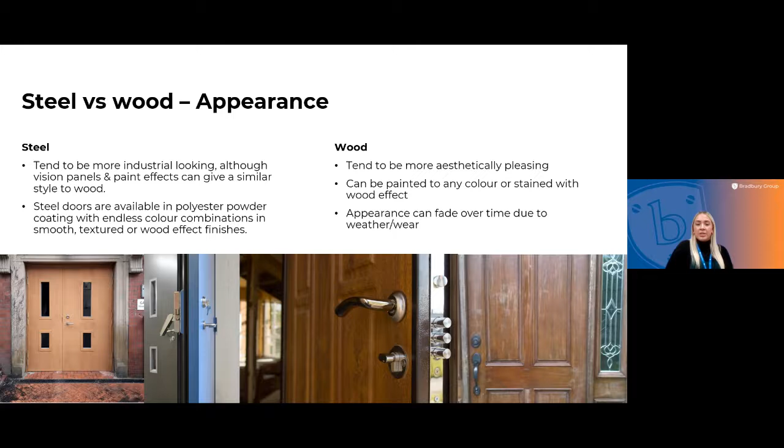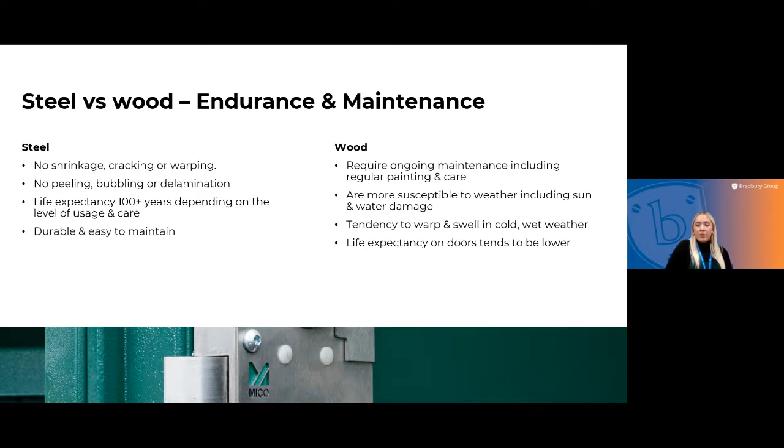Steel doors are extremely durable and easy to maintain, whereas care for wooden doors requires more maintenance. Wooden doors also have the tendency to warp and swell in the cold. Wet weather and weather exposure does impede the life expectancy of a door in general.

So, security. Steel doors provide a more natural deterrent to potential thieves due to their nature. They can resist high impact power tools and come with LPCB certification up to SR8. Wooden security doors tend to have a steel inner and are clad with wood to ensure high security standards are met, but wooden doors can only achieve up to SR6.

Generally speaking, wooden doors with lower security ratings take less force to dent, crack or break, and they have less resistance to high impact power tools.

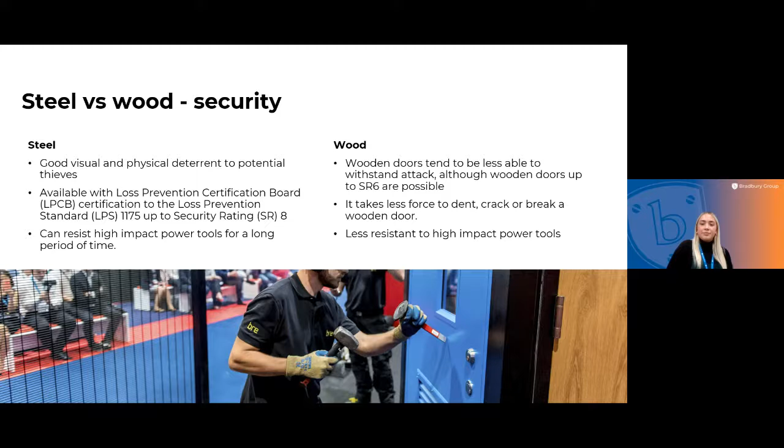Steel doors can withstand up to 240 minutes of fire resistance, significantly more than a wooden door at just 60 minutes. Steel doors tend not to require intumescent seals and fire retardant paints, which are required when fitting a wooden fire door. Normally, wooden doors cannot exceed 60 minutes of fire resistance and are subject to the same standards as steel doors.

Wooden doors can be finished to match existing timber door styles, but these need to be fire retardant in nature. Unlike a wooden door, steel doors have no limitation on width and height, meaning non-standard openings can be fitted with steel fire doors.

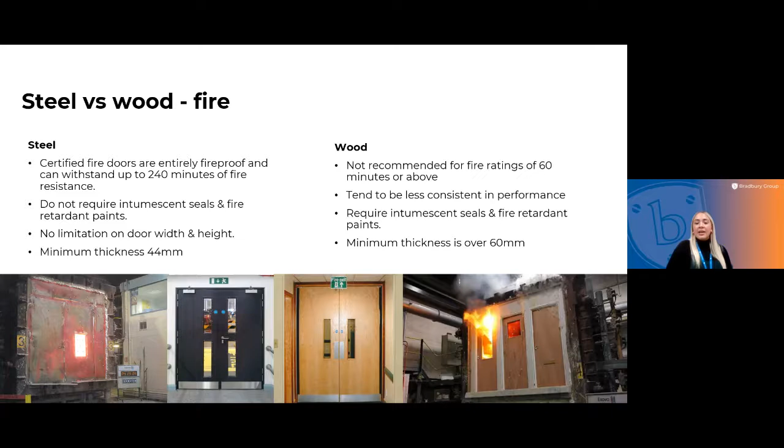So in this section, we'll take a look at a typical door formulation and the types of options you can expect to see on a steel door.

Steel doors can be certified up to LPS 1175 SR8. These tend to be more specialist providers, including the Bradbury Group.

Vision panels are available in a wide range of sizes and configurations and can be used in security doors up to SR4 and in fire-rated doors, providing they meet the industry standards.

Doors with lift-off hinges ensure much easier installation and mean installers do not have to hold the weight of the door when fitting. Bradbury doors also come with a lifting hole at the top of the door to help lift the door, dropping it into place and making installation easier, as well as a 10mm threading to enable easy lifting.

Side and over panels are ideal for aesthetics on communal doors and enable you to adapt to the opening so that a standard size door can be fitted. Door openings can be much larger than the door requirement, and panels are ideal for fitting into the door space, as a large oversized steel door can be much heavier and more difficult to open.

Polyester powder coating is a safe, clean, economical, eco-friendly, strong and durable paint method. It is solvent-free, lead-free, easy to dispose of and highly durable with a low carbon footprint. It meets a wide range of global coating standards and is available in almost any colour and range of finishes, including matte, gloss and textured.

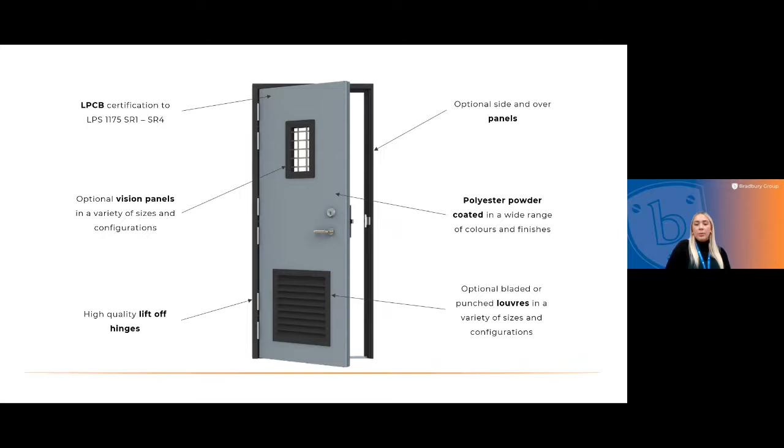Bladed and punched louvers are utilised in doors for ventilation and airflow. They can be supplied in steel and aluminium and come in a range of sizes and configurations also.

Door closers are available in a variety of devices and used to open and close doors. They can reduce the speed of movement of the door, particularly for heavy doors, and can be linked to fire alarms, ensuring the safety of pedestrians.

There are also a range of limit stays available which can prevent the doors from causing damage to their surrounding infrastructure. Fire ratings are available up to 360 minutes, providing integrity against fire for up to 360 minutes. The Bradbury Group has certified doors up to 240 minutes, meaning the doors withstand fire integrity of 4 hours.

Steel doors can be supplied in multiple frame profiles, which can be adapted to suit the supporting structure. Varying thresholds are also available to suit the surrounding conditions. As an example, inward opening thresholds can withstand water ingress, or ramp thresholds are ideal for trolleys. All thresholds should ideally be DDA compliant.

Doors are available in single, double or leaf and a half. They have inward, outward, sidewards or revolving openings. Steel security doors tend to have an inward or outward opening as standard.

Hardware is available in multiple options, but these do become more limited when standards and certifications get involved. Specifications of doors vary depending on standards, but technically a door can be made to fit almost any opening. The doors must be specified to suit the required use and standard, meaning some specification restrictions might come into play.

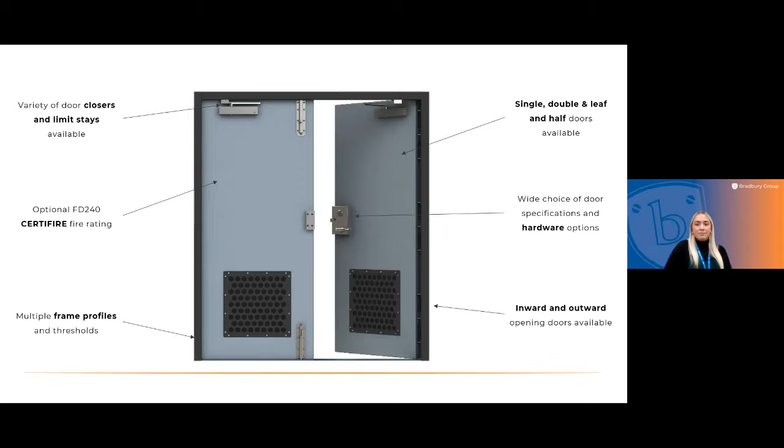Doors have many uses. A personnel door is a security door that is specifically designed and fitted to offer your employees access to and from your commercial building. Instead of being accessible to the public, these secure door systems are set up so that only approved personnel have access to and from the premises. They are an essential part of a commercial building's security system alongside CCTV, alarms and security personnel.

An escape door is one that allows people to quickly pass through, even if it is locked. They tend to open outwards towards the means of escape. They take priority over security and can be used by anybody in the building, or if the capacity for the room is more than 60. They tend to be fitted with push bars or escape locks with a lever handle externally.

Entrance doors are the main route into the building, dwelling or apartment, where there are usually more than one door. They give direct access to the street or road and tend to be more aesthetically pleasing.

Multi-point doors provide lock-in at different points to provide higher levels of security. It is UPVC doors that rely more heavily on multi-point locking due to their composition.

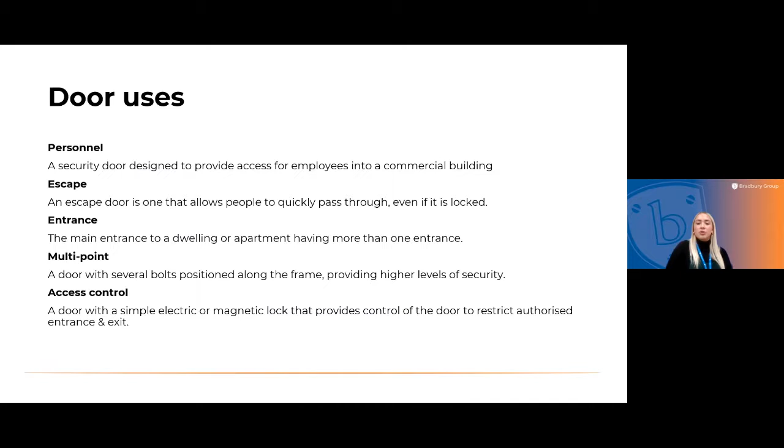In this section, we'll go through these security certifications and what they are and what they mean. These are PAS 24 and LPS. As previously mentioned, PAS is a standard set by an industry to ensure that all manufacturers are making and selling products that reach the industry benchmark for quality.

PAS is overseen by BSI, British Standards Institution, who manage the setting and distribution of the PAS standards. It is a standard of testing to measure the security performance of windows and door sets to ensure they can resist a level of attack from an opportunist burglar.

PAS 24 came into effect on the 29th of February 2016 and supersedes the previous version. It was developed as part of a collaboration with a wide range of trade bodies and organisations.

PAS 24 and Secure by Design are independent of each other. However, most Secure by Design products must meet PAS 24 standards as a minimum alongside other Secure by Design requirements. PAS 24 or an equivalent standard is now required to meet building regulations for new build properties.

Doors are subjected to mechanical loading, solid impact, hard impact, weather resistance and manual testing, including applying a force of 450 kg to each piece of hardware for 20 to 30 seconds with both shock and without shock force. It is important to note that the panes of glass are not tested as PAS 24, whereas LPS standards test this area.

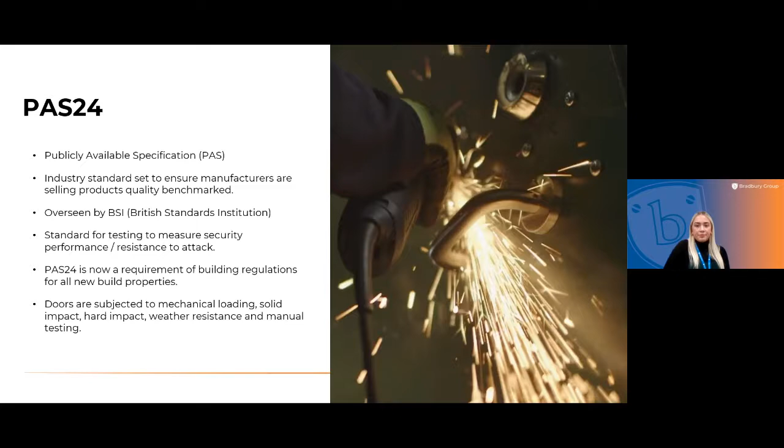LPS, loss prevention standards, are produced by the Loss Prevention Certification Board to help ensure that a product or service meets the needs of its users.

LPS 2081 is a standard created by BRE and Secure by Design. It sits between LPS 1175 rating 2 and Secure by Design PAS 24, and specifically evaluates the resistance to unauthorized access by various physical security products when targeted by intruders using stealth. The standard specifies 2 grades of security relating to tools used and time taken by intruders where they want to avoid making any significant noise.

The noise element is the main difference to this standard, which sets it apart from LPS 1175 and links directly to vandalism and security. The LPS 2081 standard is commonly used on our communal entrance doors, where vandalism is a problem on glazed doors. There are 2 grades of rating, A and B, according to the tools and time taken and time likely to be used by an intruder in situations where they will wish to avoid making significant noise.

Security rating A is the lower of the 2 security requirements. It involves a sustained attack on both glass, framework or mechanical fixings using hand tools for a period of up to 1 minute. Security B rating prolongs the attack for up to 3 minutes with an enhanced set of tools. Any doors that are awarded a Security B rating can be considered a more secure product.

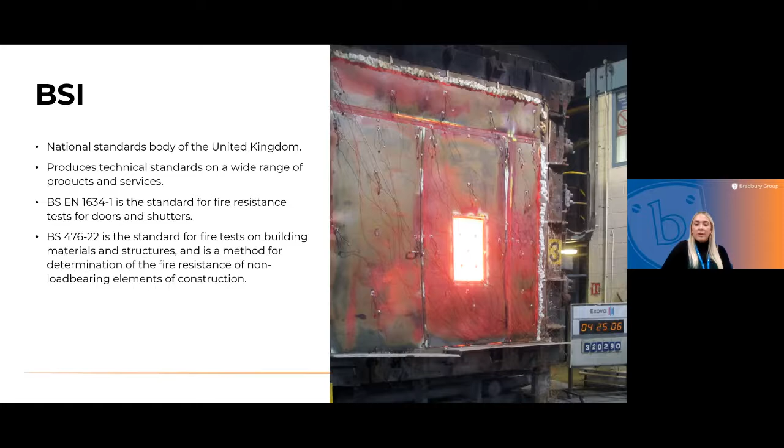So on to Certifire. It is an independent third-party certification scheme which assures the performance, quality, reliability and traceability of fire protection products. It is recognised by regulatory authorities worldwide and provides regulator, specifier, customer and end user confidence in stated performance of the products tested, giving assurance as to the performance of the products.

Using certified products correctly installed provides a powerful demonstration that due diligence has been served. Certifire is an internationally respected mark of fire safety and one of the most authoritative in the industry.

It is most used by manufacturers of passive fire products and systems as it offers the opportunity to differentiate products and processes from non-certified equivalents, thus helping to access the markets worldwide.

The scheme can also be useful to architects, specifiers, contractors and building owners, as Certifire provides assurance that correctly installed passive fire protection products and systems will perform as required, thus avoiding costs and mistakes and dramatically reducing risk.

So CE, or also UKCA - CE on external fire doors came into effect on the 1st of November 2019 and is a conformity mark used by the European Economic Area.

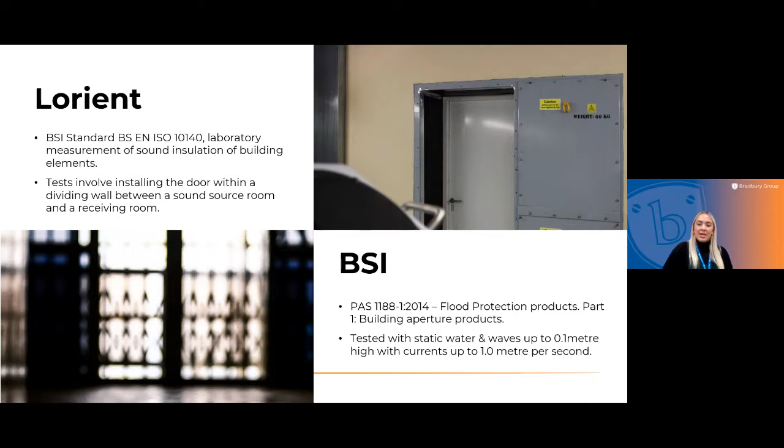So now into some products and the variations you can have with these products. Bradbury Group specialises in bespoke door sets, providing made-to-measure solutions based on project specification rather than stock sizes. Making doors to order reduces the need for packing and weaknesses in security and fire protection.

Even if a door is certified, the surrounding infrastructure needs to be sufficient to withstand attack or fire. There are a range of options available, including single, leaf and a half, and double door sets, meaning doors can be fit for purpose as well as providing the necessary protection.

A standard structural opening is up to 2,600 millimeters - that would be a very small door if it was 200. But bespoke openings can be catered for, including a range of side and over panels if required.

Bradbury Group doors are LPS 1175 issue 7 certified up to SR4 and come with fire certification up to 240 minutes, as said before. Acoustic doors are available in a range of options up to RW42, providing a good level of sound protection. All doors can come with stays and closers, and over panels can be removable for access.

So this is a typical leaf construction for an M2M2 Bradbury door. This door is security rated to SR2 and may also be fire rated. The leaf thickness is typically 66 millimeters and manufactured from Magnelis.

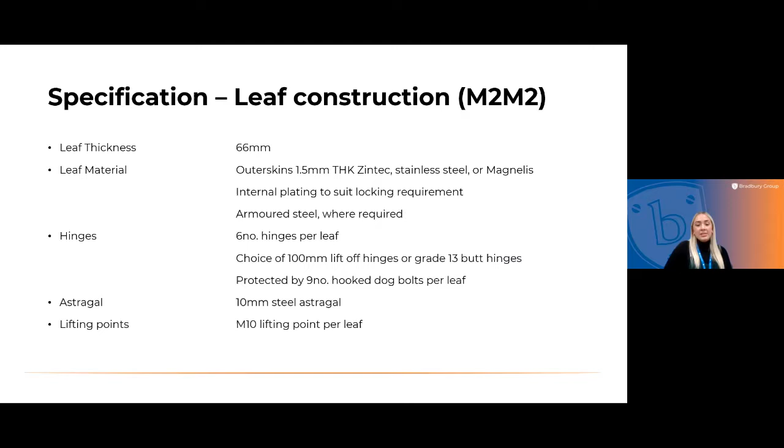And then this is a typical frame construction specification for M2M2 also. The profile tends to be 110 millimeters deep as standard, and again is constructed from Magnelis.

It has fully welded frames which are available, but standard frames can be butt jointed. Frames are reinforced with a 3 millimeter chassis system, and thresholds are available in steel or aluminium. Each door option has a specific specification, and doors can be customised depending on project needs.

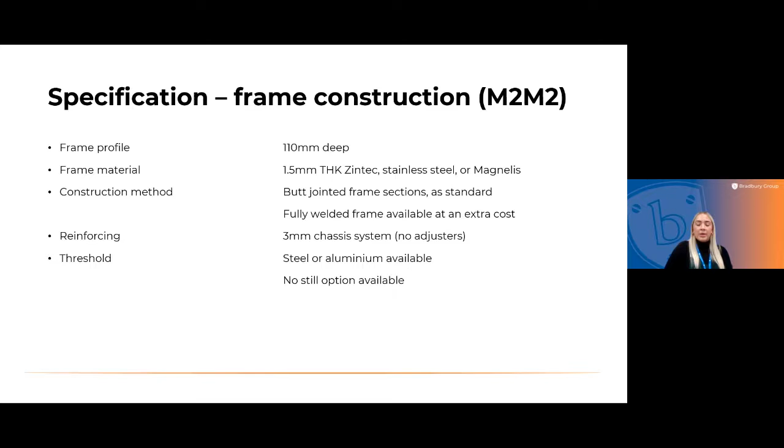We also do communal doors, which differ from the standard security door, for example our Newton doors. They are certified to LPS 2081 issue 1, security rating B, and are also approved by Secure by Design.

They are constructed from aluminium in a range of different designs, and each door can have a range of solid or glazed infills. They come with pivot hinges and a range of locking options. Optional extras specific to communal entrances can be sourced and supplied, including bollards, handrails, and kick plates.

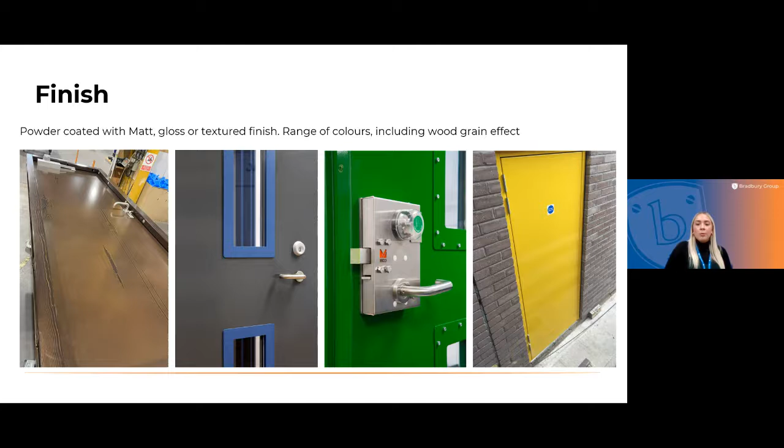So these are a few examples of the different finishes. To the left is a steel door with a wood grain effect, with the other examples showing matte and gloss finishes.

A range of vision panels and louvers can be designed into a specific door set. These can, however, affect the overall security and fire rating of a door, so advice should be sought for specific project requirements.

There are a range of certified locking options depending on the type of door required. These include Myco Brill, Myco Elite, and Myco Rim locking options, automatic and manual deadlocking, electromechanical options, and single and multi-point locking also. These options decrease as security rating increases or if fire integrity is required.

So now in the next couple of slides, I'll go through some of our case studies where fire and security doors have been needed and we have provided, and then we'll be almost finished. So I hope everyone is still awake.

West Yorkshire Police required replacement doors which provided significant security protection, for both door and window openings. The solution was to provide new secure access doors and grills, securing the police station perimeter.

The chosen doors were an M2M4, so SR4 rated door sets, both singles and leaf and a halves. The locking options included electromechanical locking with access control systems, further increasing the security. The door sets also required a fire rating of 240 minutes, providing both security and fire protection in the station.